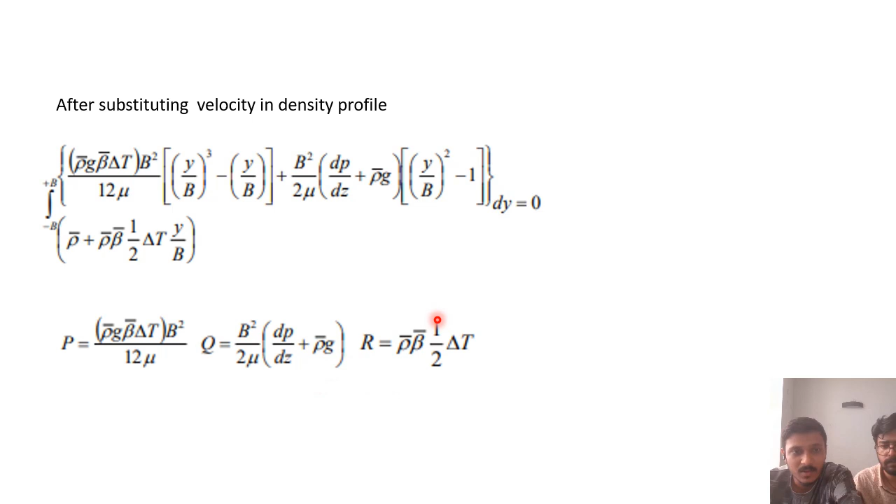So if we substitute p, q, r for simplification, this integration will look like this: integration from minus b to plus b of p into y by b whole cube minus y by b, plus q into y by b whole square minus 1, times rho bar, plus r into y by b, dy. So this will be the integration term, from minus b to plus b.

And if we integrate all these equations, we will get this expression. Now substituting values one by one, we will get this expression.

Now in this we also have the limits minus b to plus b for all the terms, and we have P, Q, R terms. Now we will discuss the PR term. What is P into R? The PR term is like the P term value into the R term value.

So for the PR term, we have the value of P from this expression and the value of R from this expression. From here we can see that delta T is coming twice, so delta T into delta T will be delta T square. And as we already know, delta T square will be close to zero or neglected. So the PR term will be neglected.

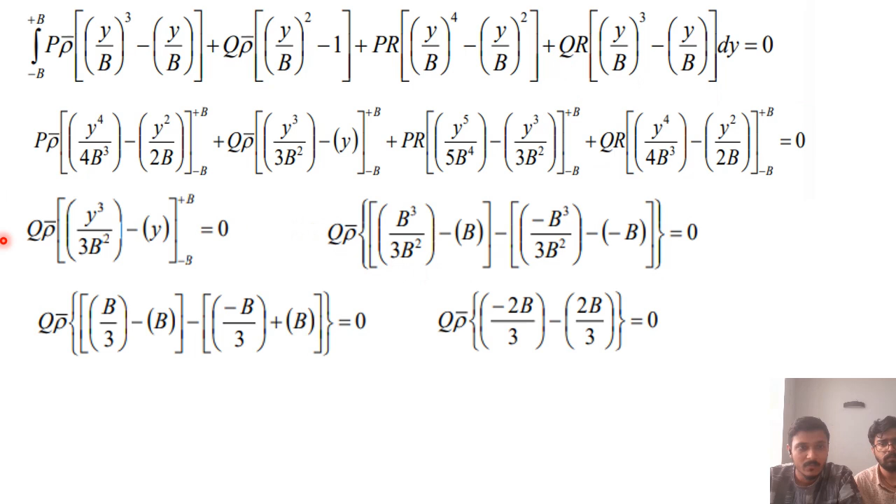So these three terms will become zero, and we are left with only this term. If we solve further, we can see that we are left with only this term, since this term was zero, this term was zero, and this term was zero.

So for this remaining term, if we put the limits plus B and minus B, so Q into rho bar, we solve this and come to this expression. After solving, we see that Q into rho bar into minus 2B by 3 becomes minus 4B by 3.

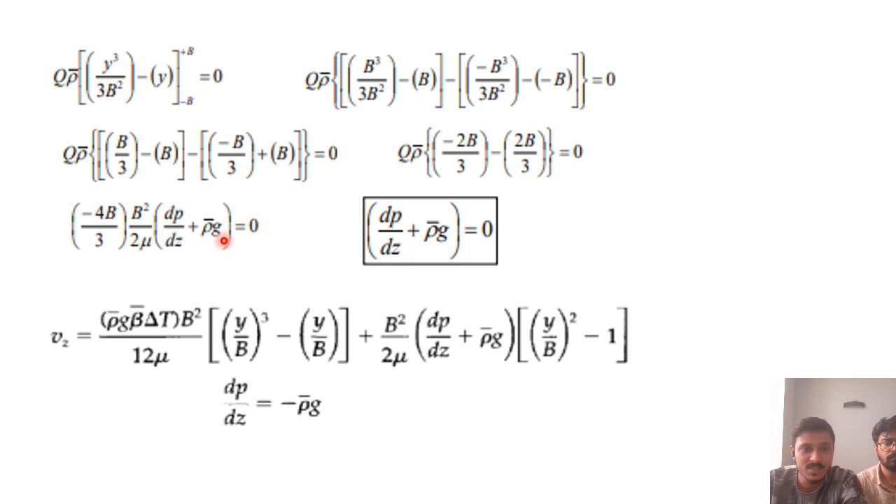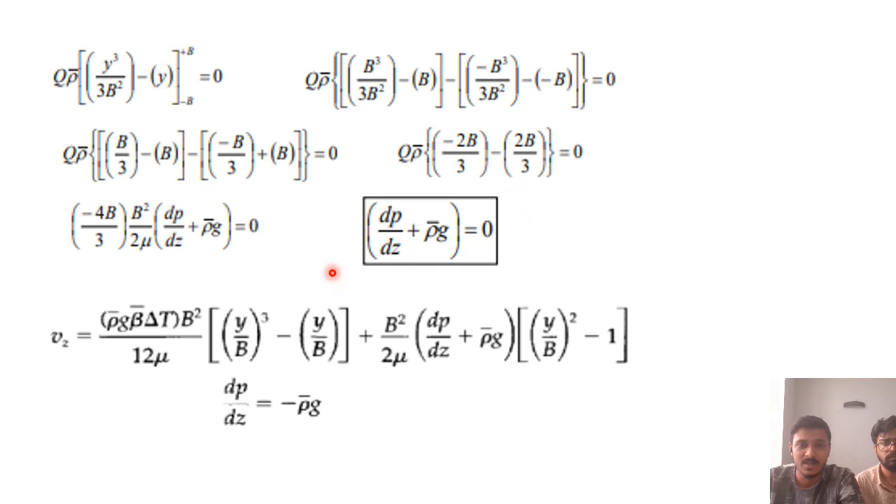So after simplifying, we can see that this becomes minus 4b by 3 into b square by 2 mu into dp by dz plus rho bar g. Now all these terms are constant and are sent to the right hand side, and we get this expression, which is our important result: dp by dz plus rho bar g is equal to 0.

Now if this is 0, and if we substitute this result back in our velocity profile equation, we substitute it back here, and we get the velocity profile equation as this, substituting dp by dz equal to minus rho bar g, this becomes 0.

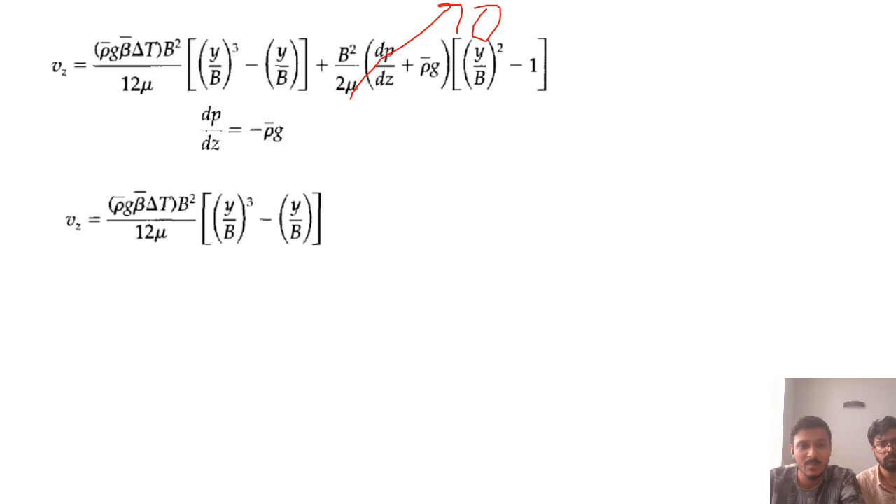So the velocity profile equation will be like this: rho bar g beta bar delta t b square by 12 mu into (y by b) cube minus (y by b). This is a simplified equation.

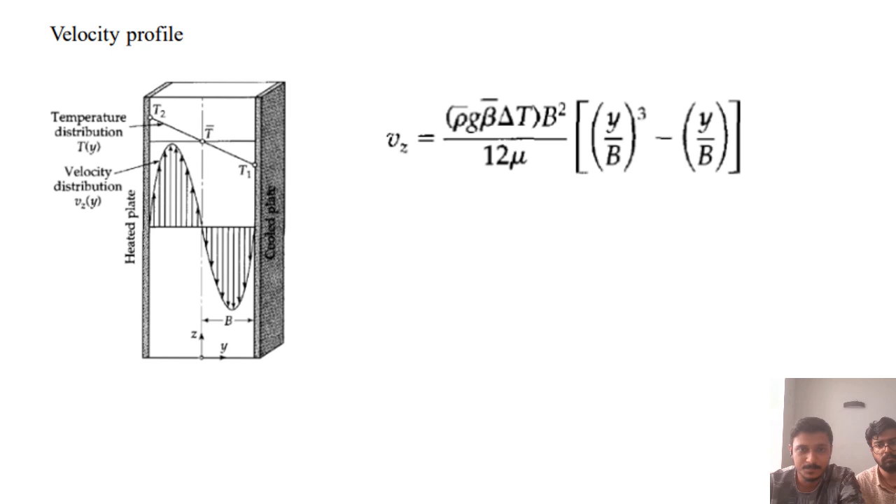Now we can calculate the average velocity. If we calculate the average velocity between minus b to plus b, it will always come out to be 0. But we can calculate the average velocity for the positive region, from here to here, for the upward moving stream, from minus b to 0.

If we calculate in this positive region, the average velocity comes out to be rho bar g beta bar delta t b square by 48 mu. This is the average velocity for that direction, and similarly for the negative direction the magnitude will be the same, with a minus vz denoting the negative direction.

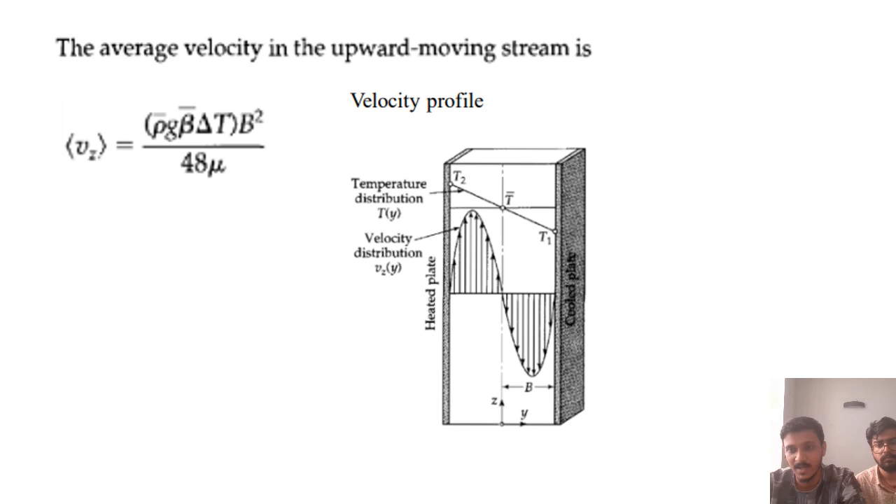Now this velocity expression is converted into dimensionless form. How do we do this? We can write vz dash as b into vz rho bar by mu. This converts the velocity into dimensionless form, and y dash will be y by b. So in place of y by b we will write y dash, and in place of vz we will convert it into the form of vz dash.

So this constant here is the Grashof number. The Grashof number comes out to be rho bar square g beta bar delta t into b cube by mu square. We will see the significance of the Grashof number in the next slide.

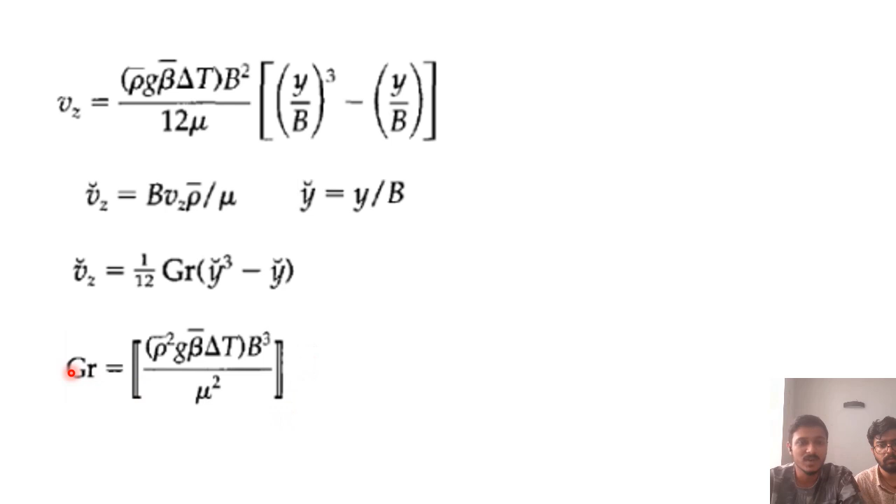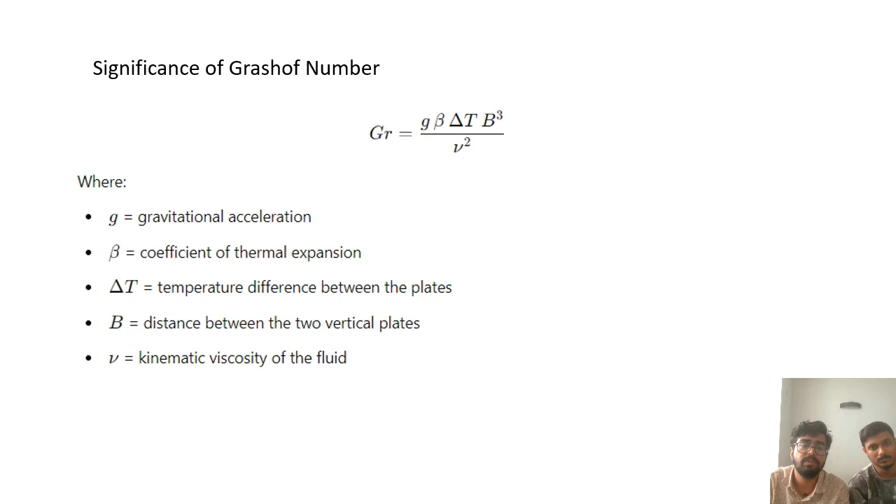Now we will understand the significance of the Grashof number. It can be written as this, where g is the acceleration due to gravity, beta is the coefficient of volume or thermal expansion, delta t is the temperature difference, and b cube is the distance between two plates. Here we have given kinematic viscosity.

After that, if we substitute the value of kinematic viscosity as mu by rho, we get the term rho square into g. Rho square into g is basically a measure of buoyancy force. Above is the buoyancy term and below is the viscosity term. Above we can say it is buoyant force, and below is the viscous force or viscous dissipation. So this basically tells us the ratio of how much buoyancy is taking place compared to the viscosity.

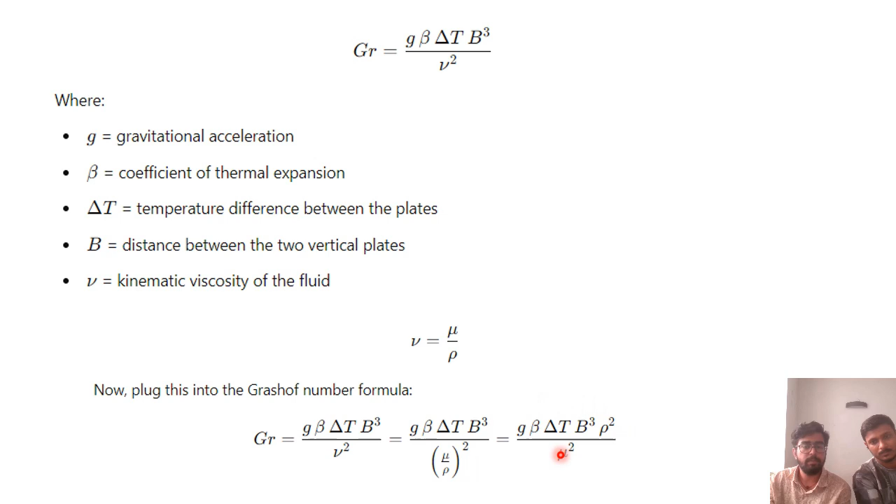That is, it relates the nature of the fluid and how far the fluid will rise based on its viscosity. Now we will see the physical meaning. The Grashof number is a key dimensionless number in fluid dynamics and heat transfer, and it is only relevant when we are dealing with natural convection or free convection.

In forced convection, we know the flow regime by the Reynolds number. Here we know it by the Grashof number, and the physical meaning is buoyancy to viscous damping. If a higher Grashof number is there, then more buoyant force is present, leading to strong natural convection. In this case we took only flat plates, but if we have an open system, the buoyant force will be more and we will have stronger natural convection.

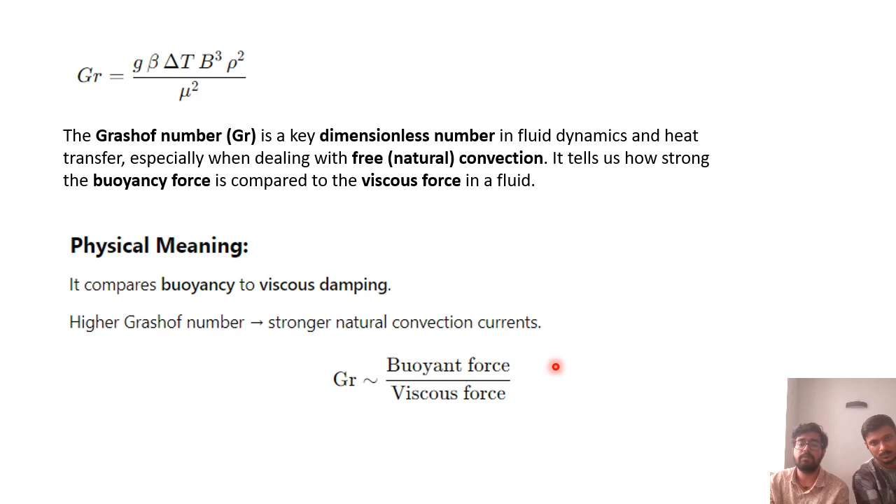Again, the Grashof number plays a role similar to Reynolds number in forced convection. A small Grashof number gives laminar flow, and a larger Grashof number could give turbulent flow. For example, in turbulent flow, when boiling happens in a liquid, bubbles violently move up and the flow becomes turbulent.

Now, if we are analyzing air rising over a hot plate due to heating, the Grashof number tells us how vigorously the air will circulate, that is, the flow regime of the air, whether laminar, turbulent, or transient. In CFD modeling also, the Grashof number is a very important input to accurately simulate free convection and buoyancy-driven flow between plates.

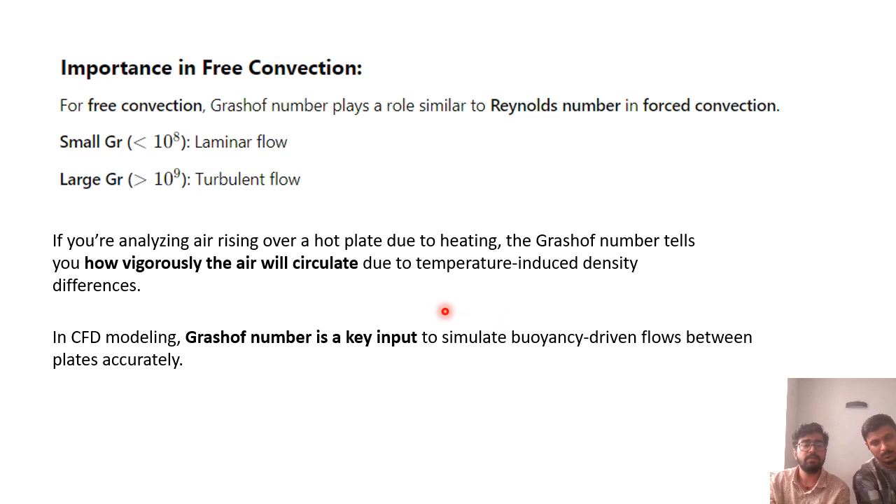So again, regarding the flow regime, we will relate the Grashof number to the Prandtl number as discussed in the first video. A lower Grashof number gives smooth flow, while a higher Grashof number makes the flow turbulent, leading to more mixing and higher heat transfer. To compare the flow regime, such as momentum diffusion, heat diffusion, and how the flow is happening, this basically tells us the flow regime and the ratio of momentum and heat transfer.

So combining these two equations, we will get an account of both heat transfer and momentum transfer along with the velocity profile, and from here we could get the temperature profile.

So again, critically, there's a certain value which might depend on different cases, because in rate of momentum, buoyant force and viscous force, the characteristic velocity and characteristic length could change. So that is what we discussed.

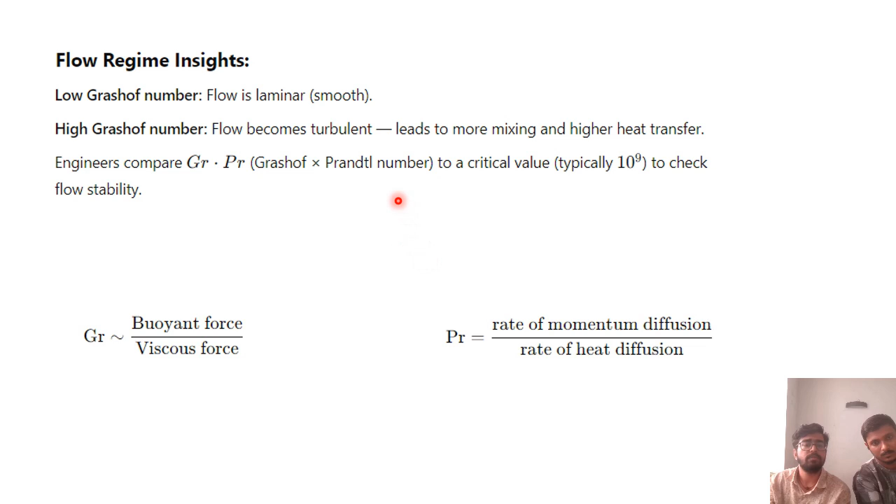Now we will see the application of free convection between flat plates in chemical engineering systems, and how this problem could be useful. The main example is the cooling jacket and reactor. Usually forced convection takes place there, but in certain situations, like shutdown or passive mode, the fluid will be stagnant. In that case, heat transfer between the reactor and wall often relies on free convection between the two vertical surfaces, the reactor wall and jacket wall, with the fluid between them.

So what happens is we can observe temperature control and reaction with this. Another important point is if the pump is stopped due to shutdown, we have to ensure that the cooling jacket is conducting enough heat. Enough heat transfer must take place even in stagnant conditions so that overheating does not occur and does not affect the reaction.

Similarly, in plate type heat exchangers operating in passive mode, if the flow rate is low or stagnant during shutdown or passive safety modes, heat transfer then occurs usually only by natural convection, as one plate is hotter than another. Again in shutdown situations, we have to make sure enough heat transfer is taking place so overheating does not happen.

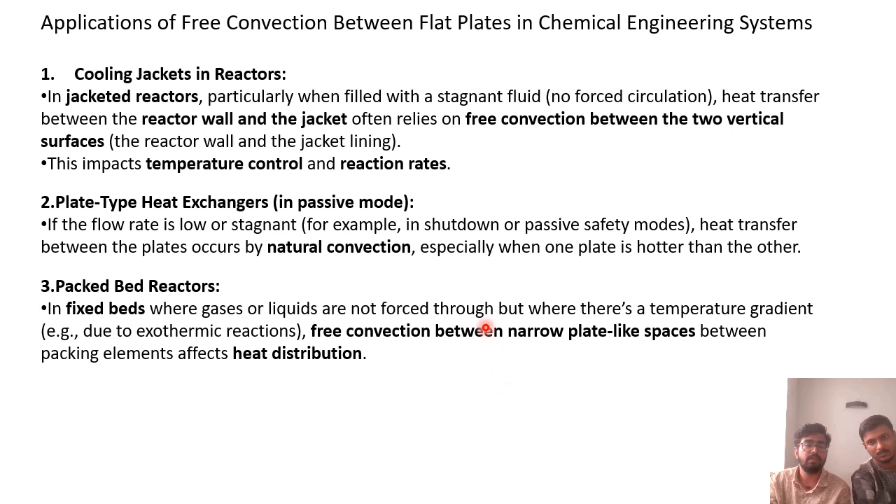Now we will see packed bed reactors. In packed bed reactors, there's usually a catalyst, and flow through the fluid sometimes happens through natural convection, where gases or liquids are not forced, but there's a temperature gradient due to an exothermic reaction. The free convection between these narrow plate-like spaces affects the heat distribution of the packed molecules, that is the catalyst. So we have to make sure proper heat transfer is taking place so the catalyst does not get overheated and destroyed, while designing the packed bed reactors.

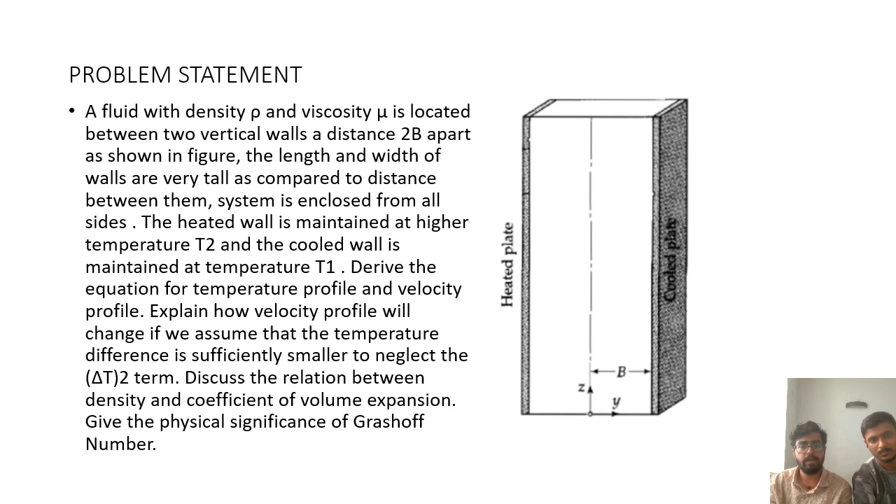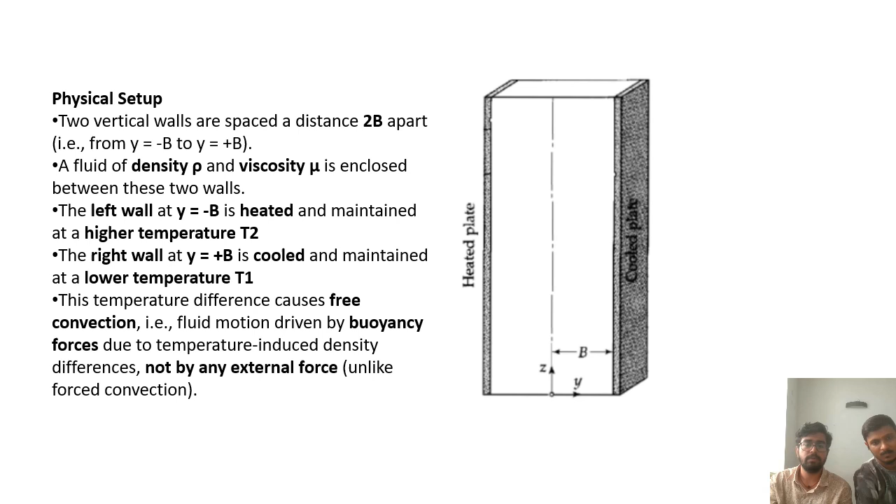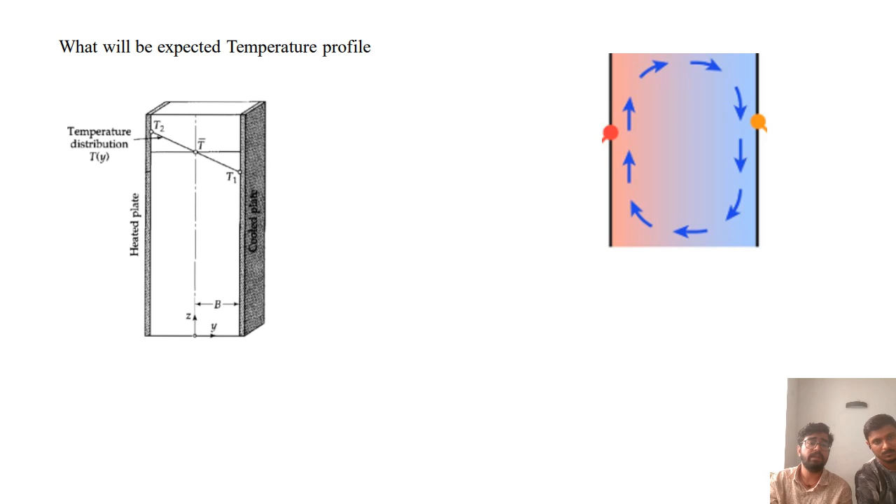First we had our problem statement, then we assumed certain assumptions. The main assumption is that the length is much greater than the width between the plates, which is very small compared to the length of the plate. Due to T1 and T2, buoyancy force causes the motion. We assumed velocity only in the z direction, and after that we got the combined flux equation.

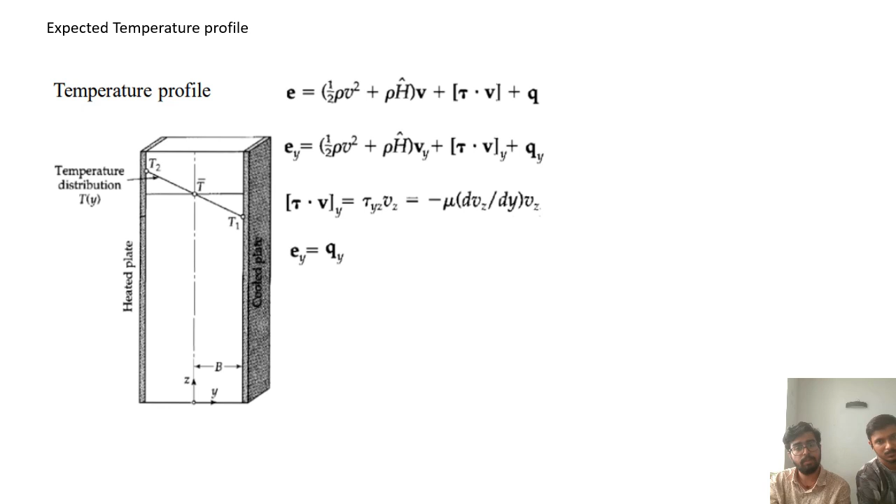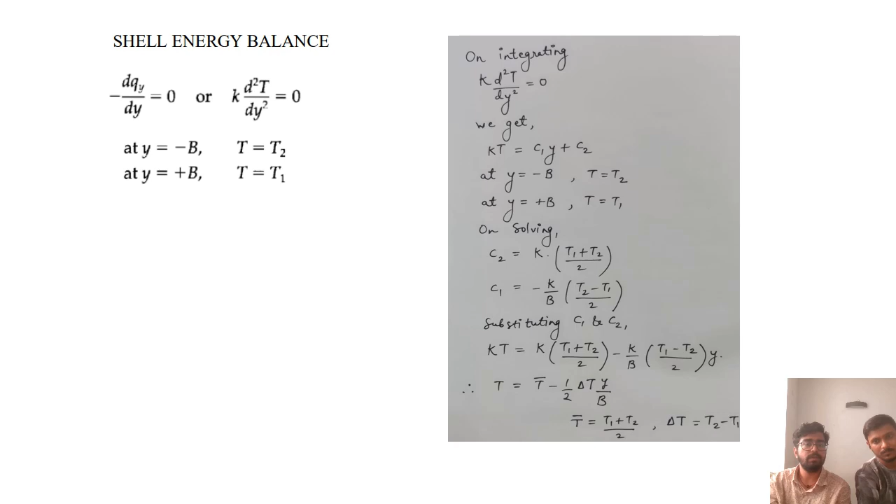We use this combined flux equation to get the temperature profile. We got the temperature profile first because the velocity depends on the temperature profile. We used the shell energy balance equation to get this temperature profile, and this was our final temperature profile.

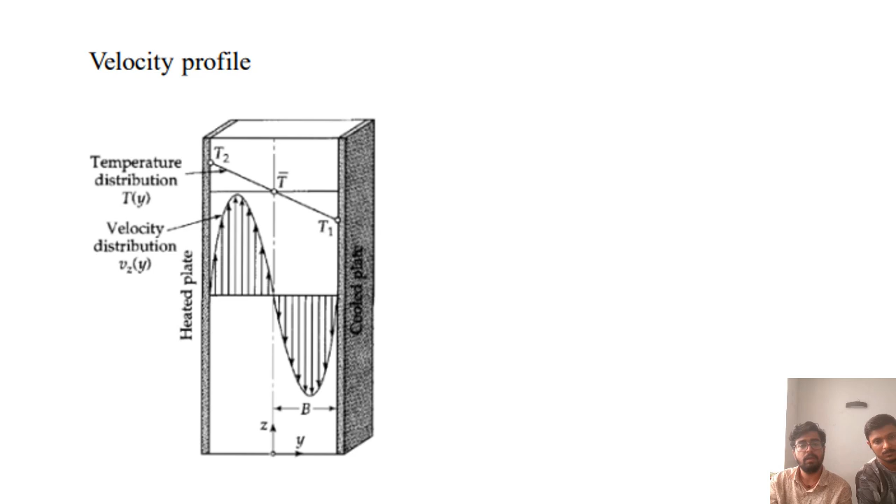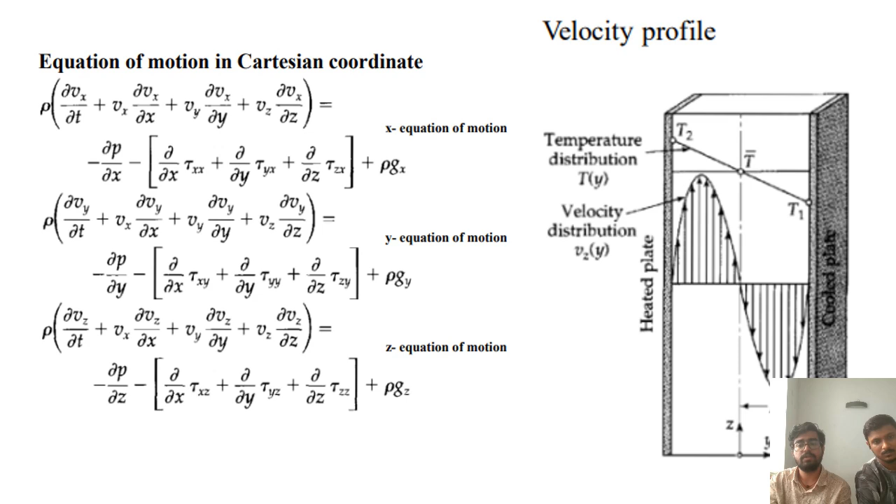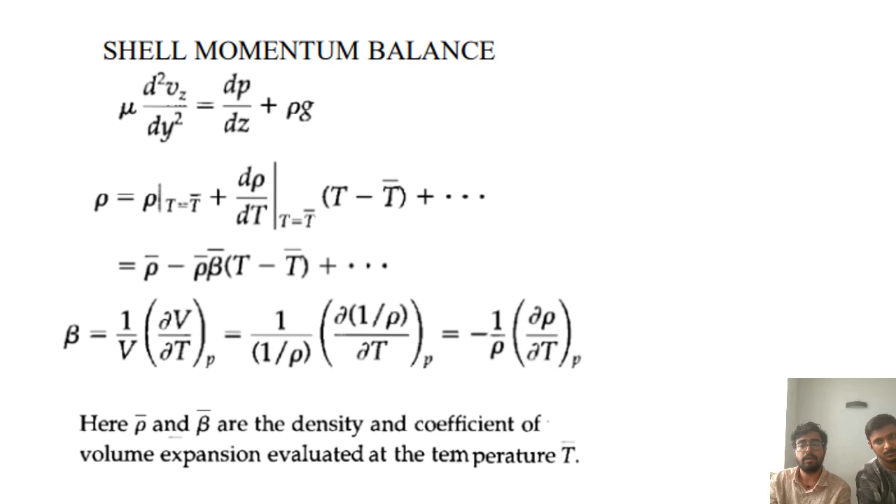After this, we find the velocity profile. We assumed a certain velocity profile and used the equation of motion in Cartesian coordinates, the Navier-Stokes equation. We neglected two equations since velocity is only in the z direction, and after neglecting certain terms, it simplified to only three terms. Then we had to substitute rho, using Taylor series expansion and the volume expansion coefficient term to calculate this. After that, we got how v depends on y, how v is a function of the length in the y direction.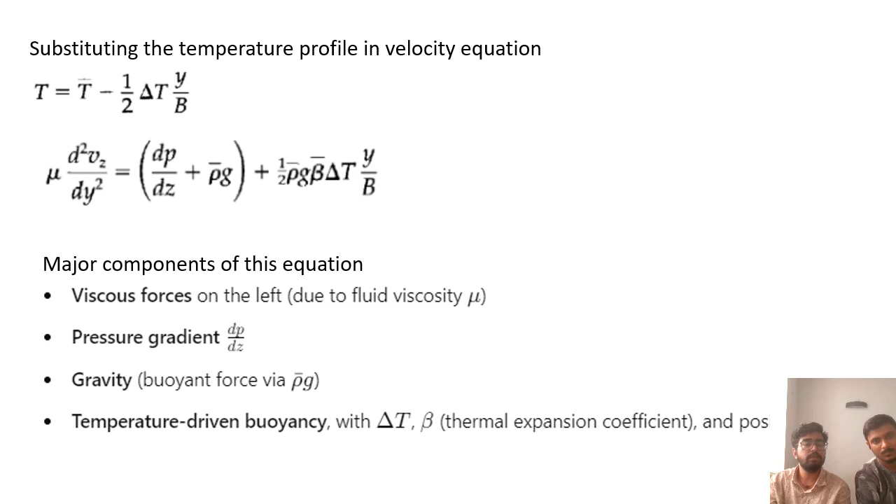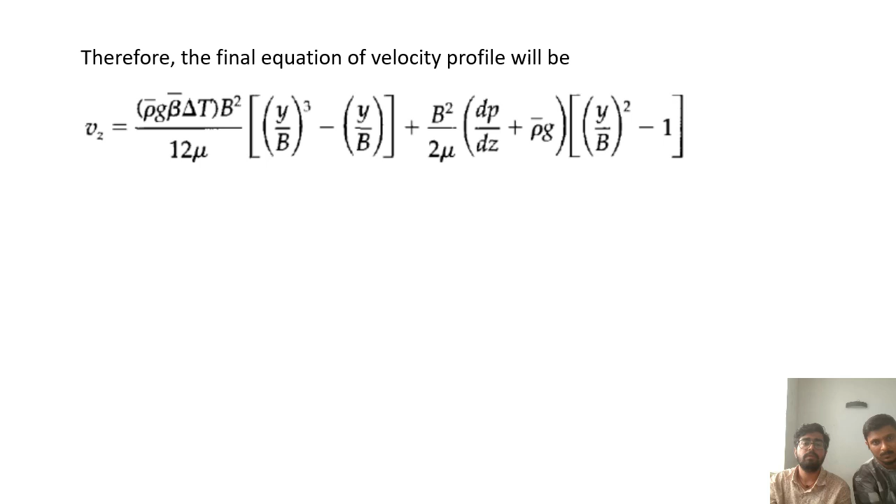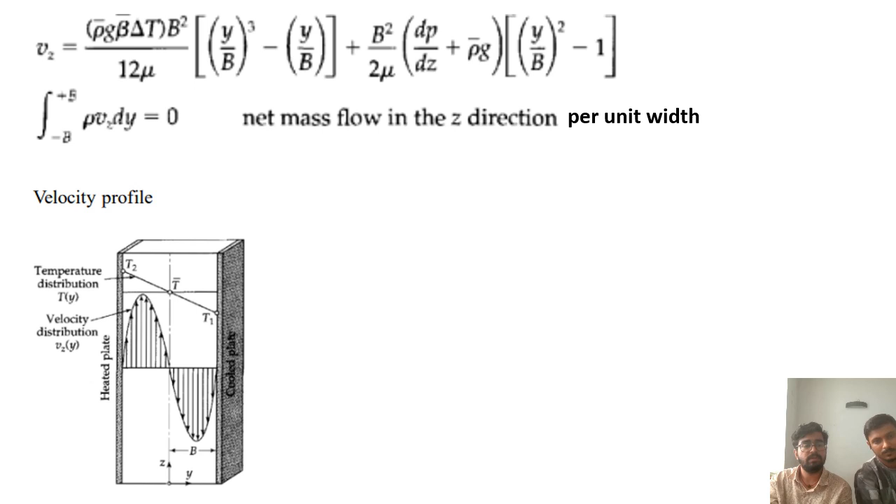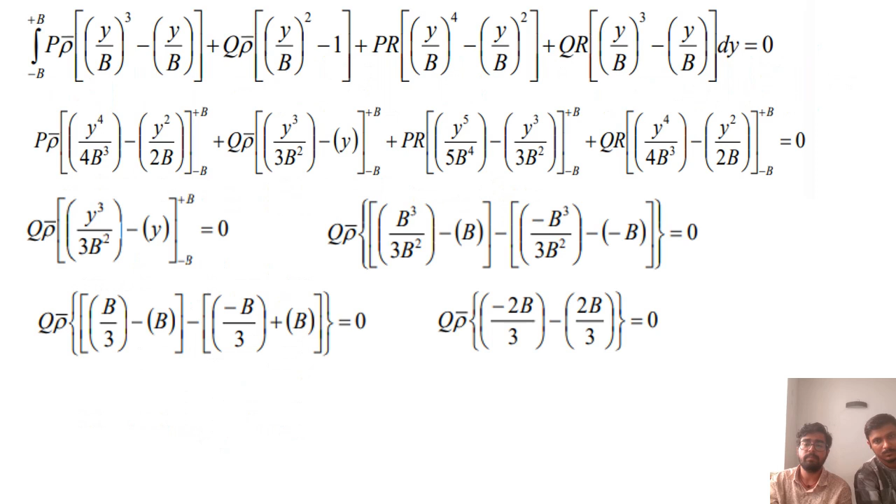After that, we integrated this equation and got a very complicated velocity profile. To simplify this, we made one more assumption: that the total average, that is the net mass flow or cross-sectional flux in this direction, will be zero. We then assumed delta T squared is very small, simplified the equation, and got dp/dz equals minus rho g. After substituting this, we got a simpler velocity profile.

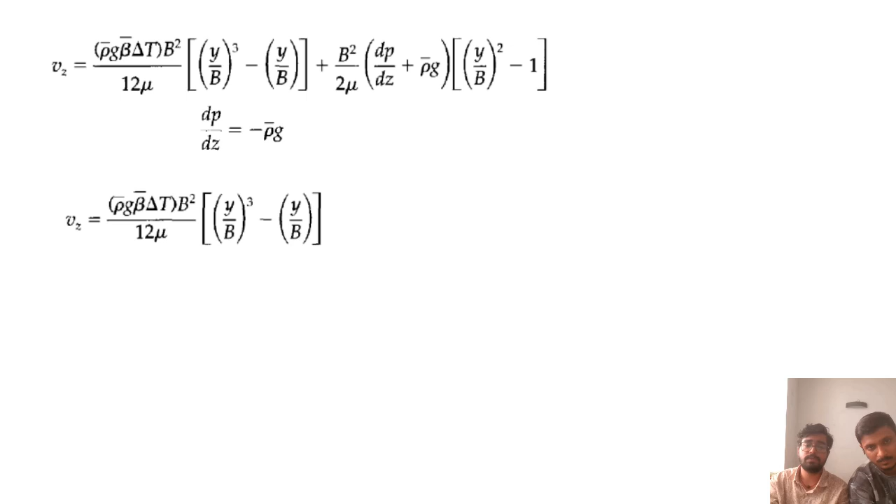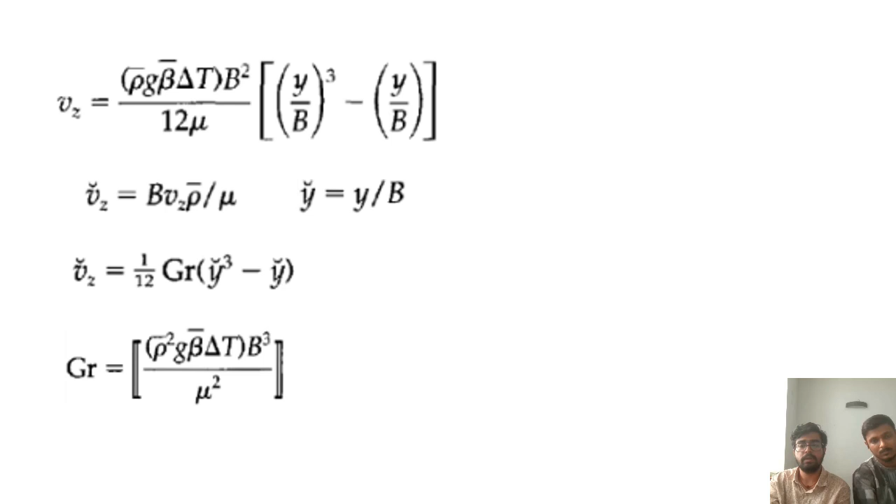Next, we took dimensionless quantities of velocity and length, and got the Grashof number. After that, we explained the significance of the Grashof number, that is the ratio of buoyant force to viscous force.